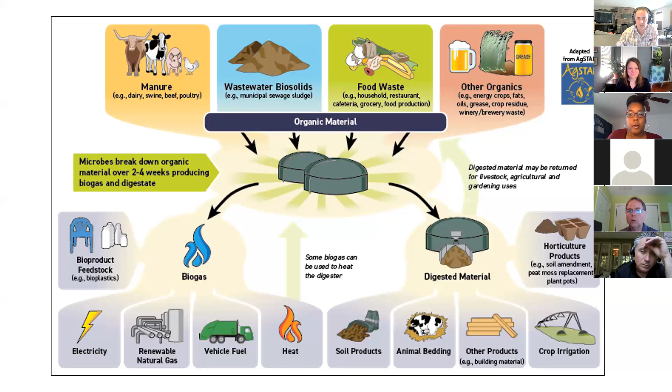We have a farm I just read about that is now getting a 4th crop every year because they're using digested material on their fields. They were getting 3 crops before, now they get 4 crops. That's a 33% crop yield boost. That is huge for any farm, and it could happen in your garden too. I could show you my camera outside—we have digested material that we use as top dressing for our grass, and it looks awesome.

So here is why there's such a huge opportunity in the US, in Georgia, and basically any state you go in. It's because we have so much organic material that is not being recycled: 66.5 million tons of food waste, 31 billion gallons of wastewater every day that has to be cleaned up so we can put clean water back into our waterways, and all the manure and nutrients from 8 billion cows, chickens, turkeys, and pigs, especially the poultry in Georgia, which I'll get into in a minute.

This is where the whole potential for biogas and RNG comes from—it's all this organic material. And if there's one thing to take away, it's that as much as we care about recycling glass, metal, paper, and plastics, if we focus on recycling all of our organic material, like our manure, our food waste, and our wastewater, we are going to have huge opportunities to do a lot better for our society. Next slide.

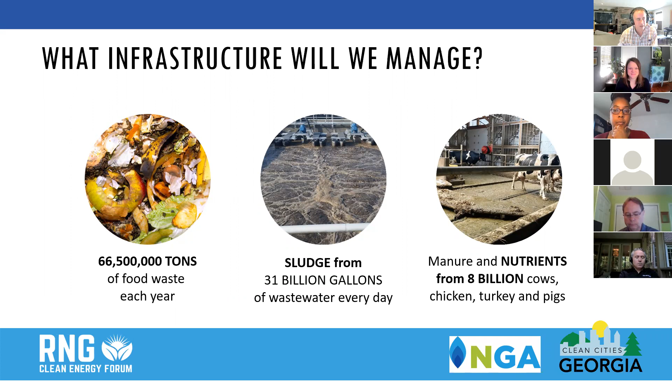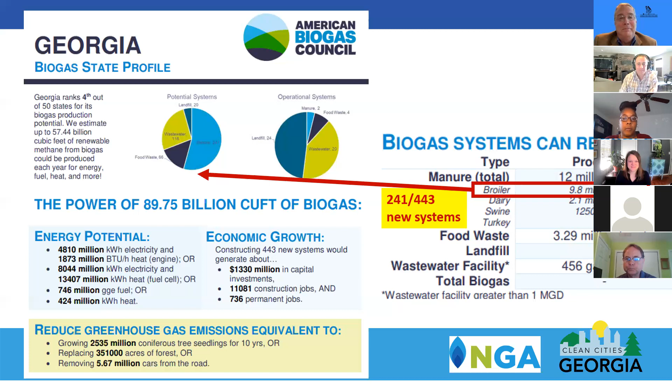The Georgia Poultry Federation is a trade association that was established in 1951. We represent poultry processors, poultry farmers, and allied industry in Georgia. My goal this morning is to give everyone just an overview of the poultry industry in Georgia, its size, its scale, its impact, and also generally where it's located throughout the state, and then discuss some of the possible byproduct streams that have the potential to produce renewable natural gas.

Next slide. Georgia is the leading broiler producing state in the nation. Broilers are chickens that are produced for meat. We're also a top 10 egg producing state - that's the table eggs. And then also we produce hatching eggs, which are the breeding stock that becomes the broilers that go to our processing facilities.

There are 20 first processing facilities in Georgia. These are the larger facilities. 18 of these are broiler facilities located throughout the state. And the poultry industry has an economic impact of approximately $40 billion in Georgia annually.

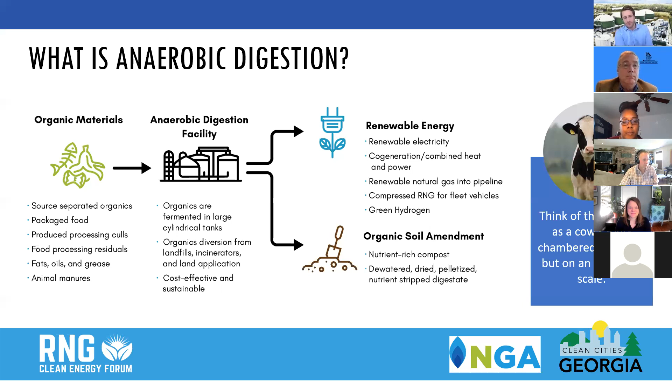When you think about these feedstocks, as we call them, you think about these byproducts coming out of the poultry industry and many other food production facilities. You think about how these are really just another organic material, a means of putting the organic material back into the natural environment, back into the farmlands that we're all utilizing for production. So we're talking about playing back into the natural cycle.

Right now, a lot of these byproducts coming out of the poultry industry, one really big feedstock we address is DAF cakes and DAF sludges. Most big poultry facilities have a wastewater processing component, and as the wastewater is processed, you get a big foam that rises to the top of the wastewater tanks. That foam is all the organic material floating to the top of the water. They skim a lot of that foam off, and it either becomes dried out into a cake, or they pump it out into tanker trucks as a sludge.

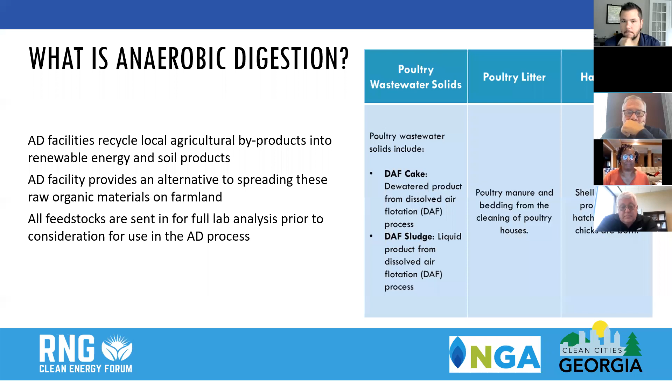We'll get into a couple of images to showcase how we're going to process this material. As the different feedstocks come in, we're looking at these DAF, dissolved air flotation materials, any kind of organic material that is a byproduct of a food processing facility, and the poultry litter coming from the poultry industry. All this stuff comes into this loading bay, and it gets slurried up and mixed together into one big tank.

All this material, we want to process into one big slurry tank, and it becomes a big soup. We actually design our facilities to accommodate the different profiles of feedstock that we're going to address from the region surrounding the facility that we're building.

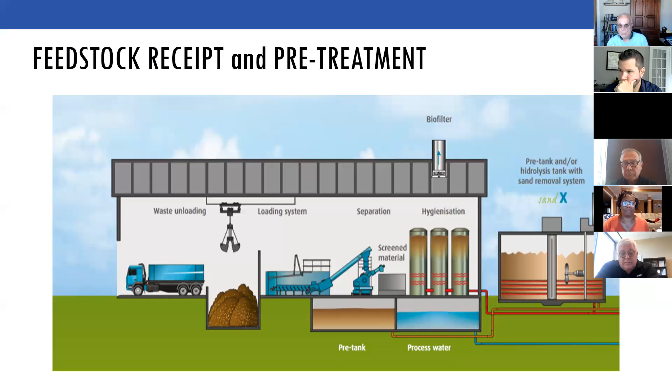After it gets into that homogenized soup tank, we're ready to feed it into the big digester tank. The digester tank allows for these microbes that already exist in this organic material to start consuming that matter. It's the same thing that happens to a banana peel thrown on the side of the road—the natural microbes consume it and it decays. In this case, we're enabling that to happen in an enclosed environment where we can capture and harness all of the potential.

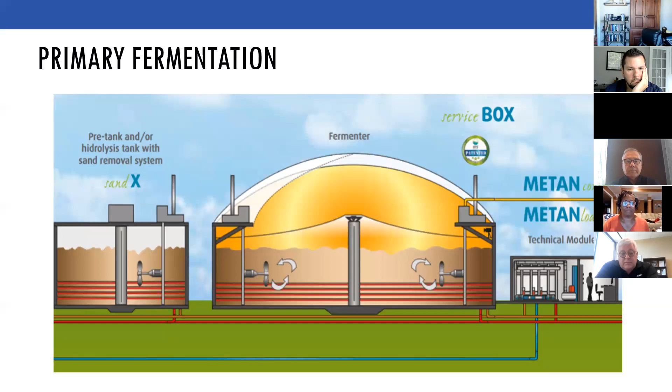A lot of that potential is in the form of the biogas that's produced. The other potential, which we'll talk about in a bit, is that soil amendment byproduct as well. So if you'll go to the next slide, we'll talk about just that.

So this soil amendment, the way that it comes out the back end of the digester system, it's coming out as a digestate, and it's about a 4% solids content in a liquid waste stream.

So what we wind up doing is we filter out the remaining organic material in that liquid through a reverse osmosis filtration system. The liquid will then either be used for dust control and management, or go back into the sewage system, or whatever the local environment needs that liquid to go back into. The remaining organic material that we separate out, that's what becomes this nutrient-rich soil amendment.

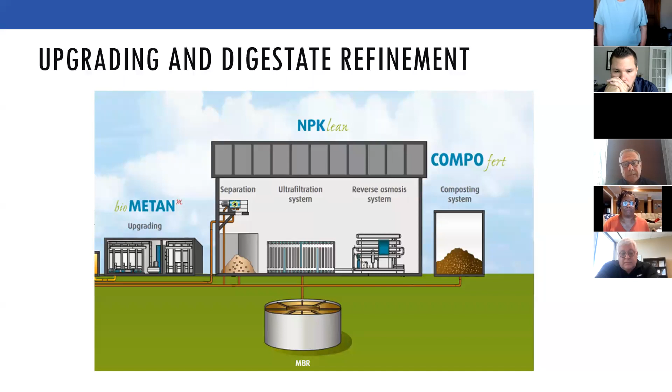The really interesting thing we're able to do here is, if you'll go to the next slide, you'll see some imagery of this byproduct we're producing. With a lot of these, the poultry litter and the DAF sludges, right now these sludges are being land applied, and the nutrient value, the NPK balance, is such that you've got such a nitrogen rich material that the crops can't always absorb all of it because the NPK balance isn't quite right.

So what we can do in our systems is fine tune that NPK balance to accommodate what is needed at the farms where we're going to deliver this soil amendment. We're not necessarily taking away that process, instead we're just improving the process of re-delivering that organic material back into the natural environment where it's needed, especially on these farmlands.

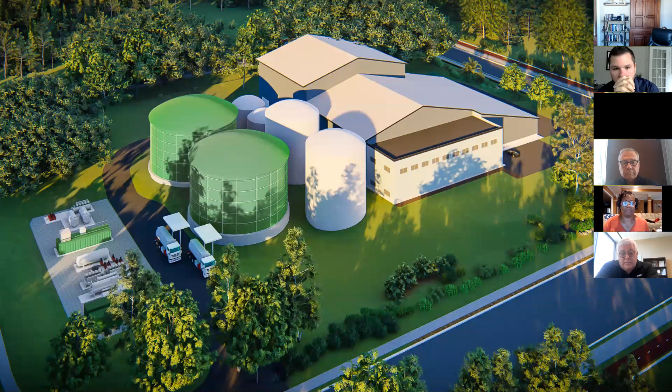Then if you'll go to the next slide, you'll see a rendering of a facility that we're under construction on right now up in Maryland. I like this image, it shows the enclosed nature of the entire process.

The entire process we're talking about here, as opposed to it going and being land applied or going to a landfill, every step of the way, from when that waste comes in from the tanker trucks or from the roll-off trucks, it comes into that feed bay that we saw earlier in the little cartoon image. You're going to be delivering that into a feed bay where the bay door comes up, and you've got a reverse vacuum system that sucks all the air in. From that point on, all that material remains in an enclosed system as it gets tanked and piped through the different series of tanks that we saw in those cartoon images.

And then if you'll go on to the next slide, we'll talk about the gas. The gas that we're producing is, like Patrick described, a biogas. It's about a 60% methane content with about a 40% carbon dioxide and a couple other nasty things in there.

So if you'll go on to the next slide, we'll condition that biogas. There's a few different means of processing these. With anaerobic digestion, we typically like to use a membrane system, which effectively just filters out that carbon dioxide content, bringing the 60% methane content up to about a 96% methane content, so that it can become pipeline quality gas.

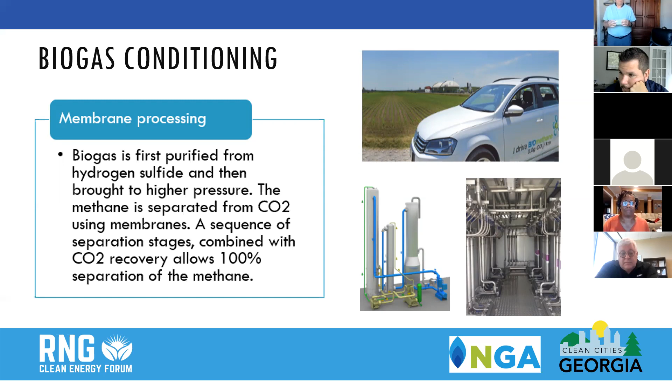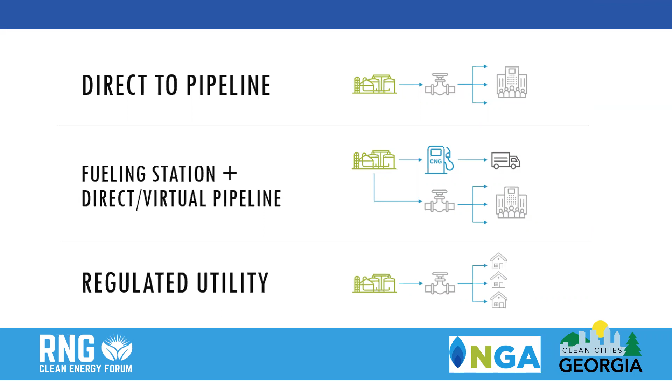And then from there, if you'll go on to this next slide, there's a handful of different ways that we wind up getting this renewable natural gas to market. If the state we're operating in doesn't have its own incentive program, then we'll typically put it into the pipeline, and it'll be transported to either a state where they do have these incentives, like the low carbon fuel standard that's active in Oregon and California, or to a big operation like L'Oreal, which has quite famously been doing a lot of RNG consumption.

There's a lot of big consumers too, like data centers are starting to look at consuming renewable natural gas as a means of decarbonizing their energy consumption portfolios. So we'll put it into the natural gas pipeline system that's already in existence, and use our renewable natural gas production as a means of decarbonizing that system, transporting that gas to its end user.

The other big consumer of natural gas, which you'll hear a lot more about later on, is folks like UPS. They're one of the largest consumers of renewable natural gas in the country, because they've got massive fleets across the country consuming compressed natural gas in their trucking fleets. And there's all these incentive programs, like we heard from Patrick, the renewable fuel standard, that really produce a lot of value for both the producer and the end user.

These trucking fleets, there's a lot of incentive to allow these folks to make it - it makes a lot of economic sense for these folks to be consuming the renewable natural gas in their systems. Now, finally, if the state has either some kind of low carbon fuel standard type system, or if the Public Service Commission has enabled the local utility to sell the natural gas to their customer base, then we can allow this product to be an option for residents or business operators to also decarbonize their own energy consumption.

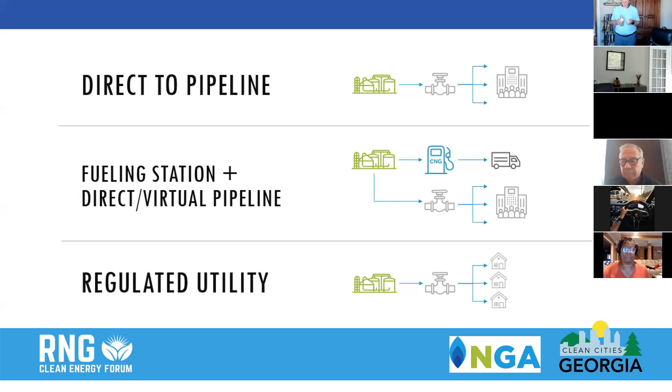Sorry about that, folks. I'm Kevin McCracken, Vice President of Business Development for Chesapeake, and I run Marlin Gas Services, our virtual pipeline company. I want to focus on the different roles in the value chain related to RNG - specifically transportation, be it pipelines or virtual pipelines, the interconnection with the pipeline system that has to be put in place, and then the RNG offtake, which was just talked about.

We're involved in the various pathways you go through and the things you have to do to condition the gas. These are the various areas where you can provide value: you go out and contract for the feedstock, put in the AD and EPC contracting to build out the facilities, the biogas cleanup equipment and contracting, then it gets to the pipelines and virtual pipelines - the interconnection design and construction, whether the pipeline does that or allows a third party to, and the offtake agreements associated with the gas.

Finally, in order to get the incentives, you really have to put the gas through the CNG station. So you're going to have people developing CNG stations and operating those, and you have to have a fleet of CNG tractor cabs - so you have to get the fleets involved. Those are the various areas you can be involved in, and Chesapeake's involved in all of these different areas in the RNG stream.

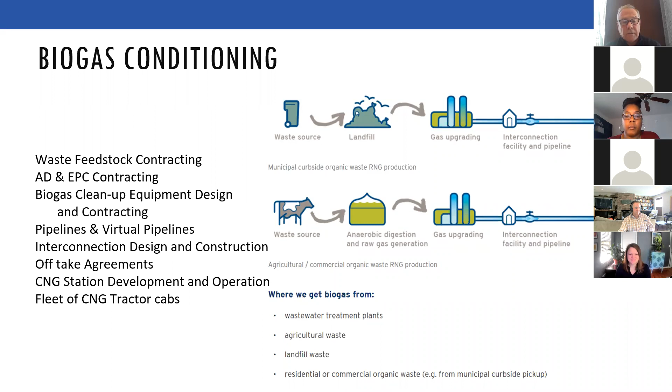The success of RNG is going to be based on a number of factors including the policies associated with the environmental ESG being pushed on different companies, access and interconnection with natural gas infrastructure - which you'd think would be simple, but it's a pretty complex process, and some systems don't want the gas and others do, so you have challenges associated with that. Development of natural gas fueling stations and deployment of natural gas vehicles is an area that isn't as focused on, but is going to be needed.

In order to generate the incentives, you have to put the gas into a CNG tractor, so development of more CNG stations should be forthcoming. And then you've got to overcome national bias towards gas and some of the things going on related to fracking and electrification. So we've got to be proactive and educate everybody in order to be successful here.

So the virtual pipeline system - how does that work? You create the waste, it goes into the biogas, then into the processing facility where it's cleaned up to pipeline quality. Pipeline quality for a CNG trailer is the same as if it's going into a pipeline. These CNG trailers are pretty large, pretty heavy - they can carry up to about 500 decatherms of gas.

Then you transport it over to a pipeline interconnection or a customer location. You have to have a regulation unit to take the pressure, because the pressure in those trailers is about 3,000 to 3,600 pounds, and your applications are typically going to be between 0 and 150 pounds. So the regulator has to take that pressure off the trailer and cut the gas down to a pressure the application can use. That's how a virtual pipeline works.

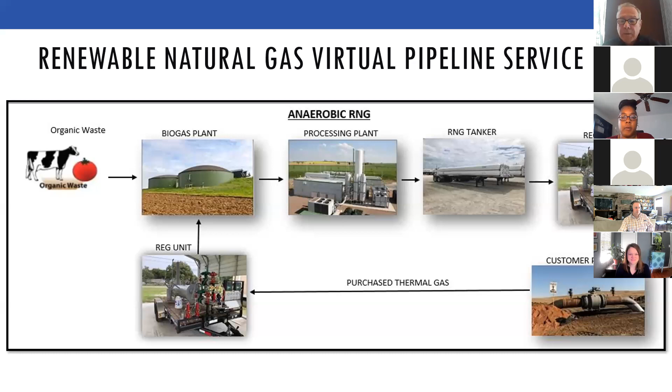Speaking to CNG, we're in the process of building, with our partners at Southern Company Gas, the largest public CNG station on the Eastern Seaboard. It'll be at the Port of Savannah, on Long Range Road. We're putting a very large station in because we can accommodate filling our trailers, handling up to almost 200 trucks a day. There's 12,000 trucks a day on that road now, up from 7,000 last year. It's the major entryway to the port.

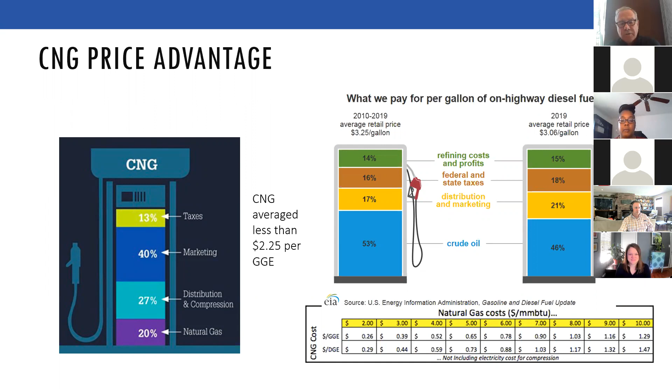So what is the CNG advantage versus price when you look at diesel tractors versus CNG tractors? It's getting wider because diesel's increasing in price. I put this together to show where the price is at today. The big difference is that with crude oil or gasoline, almost 50 to 60% of your cost is typically in the commodity, where with natural gas it's only 20%. That reduces volatility, meaning you can buy gas commodity prices out into the future at a lot cheaper price. Typically the rest of those costs are fixed, so you don't have to worry about them.

On reducing emissions, one challenge I get is: you take the RNG and put it in a gas distribution system, but we hear there's methane leaking all over the place. They've done studies and come out with the inventory of US greenhouse gases showing less than 1% of emissions come off natural gas distribution systems. It's typically organic and ag that's over 50% of it. You've got other transportation areas, and local distribution systems make up only 1%.

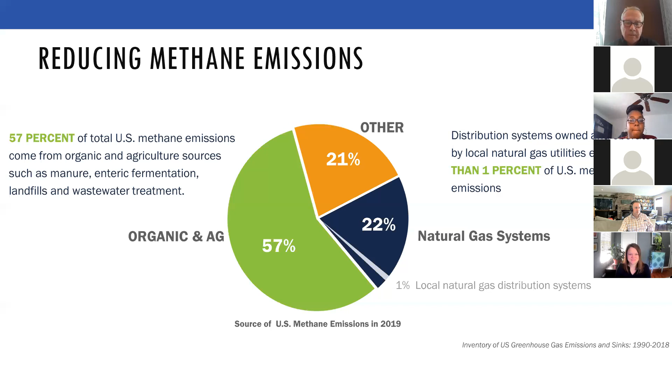So I'm introducing Ian Skelton. Ian and I were fortunate enough to work together, and he's director of natural gas vehicles at Atlanta Gas Light. Thanks, Ian, take it away.

Thank you, Kevin. So this slide recaps some of what we've already heard, but I'm going to focus on the box on the right, which is the end use applications for RNG. RNG is transported in pipelines and delivered to end users, both for thermal and transportation uses.

As already discussed, most of the RNG produced today is used in the transportation market due to the policy-driven incentives from the federal RFS, Renewable Fuel Standard Program, and the states that have low carbon fuel standard programs. But there's also growing interest in the voluntary market to use RNG in buildings, homes, and thermal markets, and for industrial manufacturing. The market for homes, businesses, and industrial uses is expected to grow as the industry begins to use renewable thermal certificates to quantify the benefits for these heating applications.

MRETS, an organization that validates the environmental attributes of energy, has created an RNG tracking system to avoid double counting concerns. And Green E is currently working to create a new standard and certification program for RNG. So regardless of end use, RNG is a sustainable waste management solution, a clean and reliable energy option, and has a positive impact on local economies.

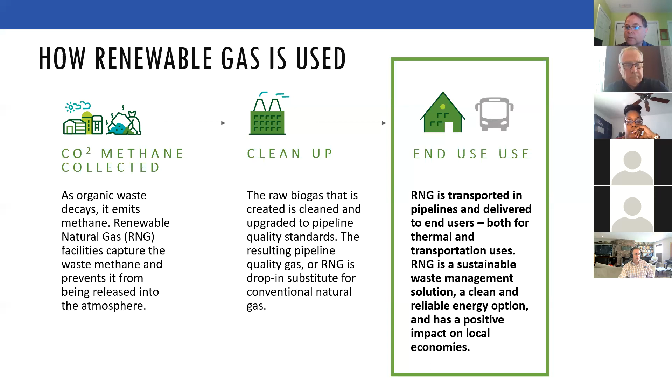So I'm going to focus a bit more on the transportation applications. The use of RNG last year increased to 53% of the total amount of natural gas used for transportation in this country. To put that in perspective, the annual volume is equivalent to eliminating greenhouse gas emissions from 8.7 billion miles traveled from passenger vehicles, or the sequestered carbon from 4.3 million acres of forests.

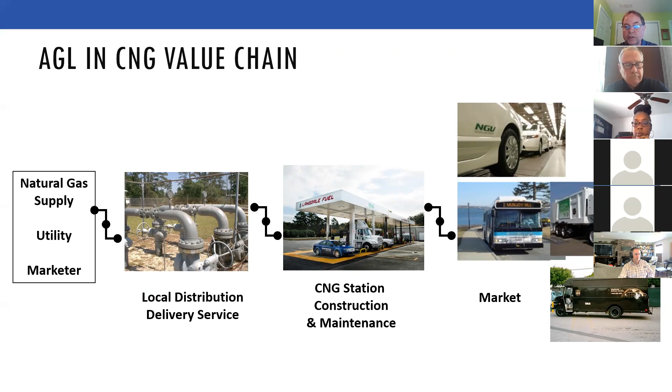Atlanta Gas Light has a long history of supporting the CNG market here in Georgia. We began our program back in the early 90s to work with our fleet customers. We're delivering the gas to the end users, to the CNG stations, and we're also building and maintaining CNG stations for our customers. So people can turn to us for delivery of the gas and the construction and maintenance of the stations. And the end use market for transportation is primarily your fleet applications—the return to base, centrally fueled vehicles such as regional trucking, public transportation, and refuse collections.

So how does RNG add value for CNG fleets? Well, first of all, using RNG in your vehicles allows you to reduce your greenhouse gas emissions on a well-to-wheels basis by at least 70%, or even carbon negative, depending on the source of RNG from certain agricultural digesters.

It's the same vehicles, the same equipment fueling the vehicles. It's just how you source the gas. So RNG for CNG is a low-cost way to reduce your carbon footprint, and in the right applications, the vehicles pay for themselves and achieve a positive ROI. It really compares favorably to other projects a corporation might pursue to reduce greenhouse gases on a dollar per pound of emissions basis.

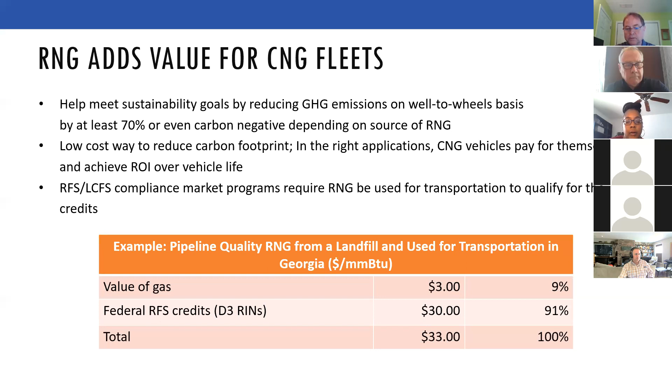In the current market, if you were to use RNG for transportation in Georgia, this is an illustration of the cost of the gas itself. It's been trading around $3 in that range. Using round numbers, the federal RFS program credits for the D3 RINs, as they're called, have been hitting $30 back up to $30 an MMBTU. So the actual value of the RNG is considerably more than just the regular pipeline flowing gas.

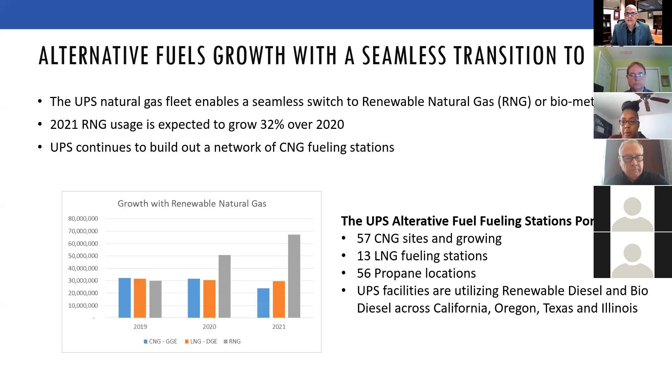This slide just talks about how easy it's been for us to switch to RNG. It's a drop-in fuel. The usage, we anticipate growing 32% over last year. And we're still pretty much building out our infrastructure and our CNG fleet with different facilities, as far as growing our fleet by purchasing more vehicles. If you look at the chart in the bottom left, you'll notice from 2019 to 2021 just how much RNG has risen. Next slide, please.

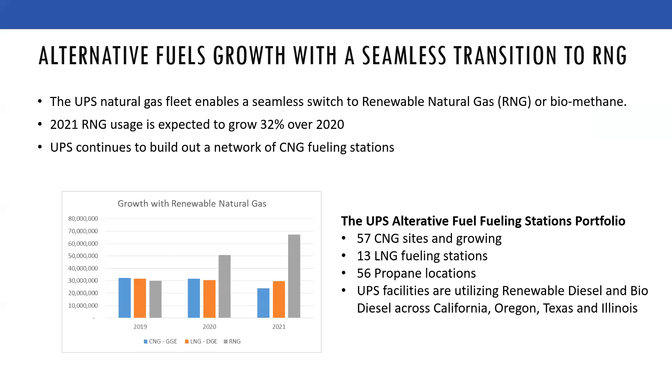This slide just depicts that 61% of our natural gas portfolio in 2021. So as the year goes on, we're increasing our portfolio. As time goes on, we'll probably further increase our RNG, CNG, LNG portfolio. And I will say that we are actually looking at renewable LNG now, liquid natural gas, for our LNG fleet.

So let's bring this back to Georgia, where UPS is. We currently have 4 buildings that use CNG, RNG in Florida... excuse me, in Georgia. We have the Sandy Creek building, the newest building in Atlanta. We have the Tifton building. We have Doraville, which is the same as the Pleasantdale building on Pleasantdale Road. And then we have the old Atlanta building, which some of the fleet bled off into the new Sandy Creek facility, which is a close distance from the old building.